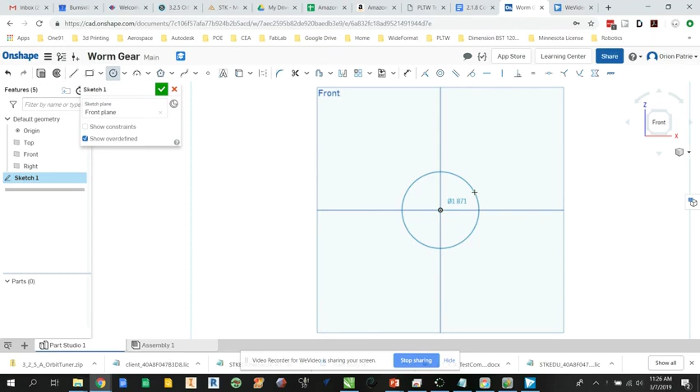Okay, so today I'm going to show you guys how to make a worm gear and worm set on Onshape. So first thing we're going to do is we're just going to make a cylinder. Okay, so I'm just going to put a sketch on this front plane. I'm going to make a circle. I'm going to make mine 0.375, 3/8.

I wouldn't really go any smaller than that because if you're going to 3D print it, for whatever reason, it doesn't come out. And then go ahead and extrude that. And you can extrude it an inch if you want. It doesn't matter which direction, but go ahead and make that. And then we're going to put some threads on that.

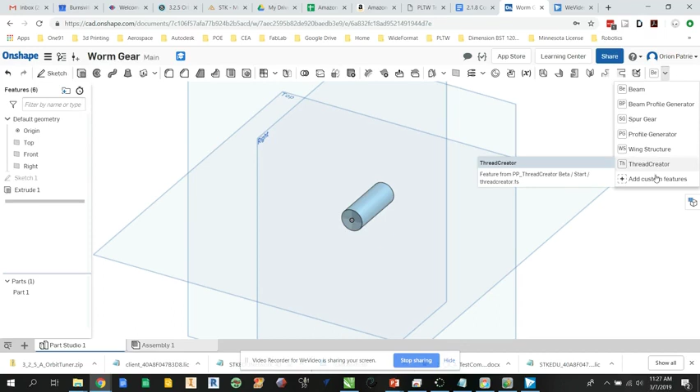So we're going to go up here to our custom features. And hopefully you've already got the thread creator. If not, you want to go to add custom features and add it. But you want to put the threads on there. You want to choose this. It's a 3/8 8 now. We want it to be a 3/8 10. So we're going to make this 0.1. Make the pitch 0.1. That should make it a 3/8 10. Fully threaded. Okay, so you can see the teeth on there. So go ahead and green check mark that.

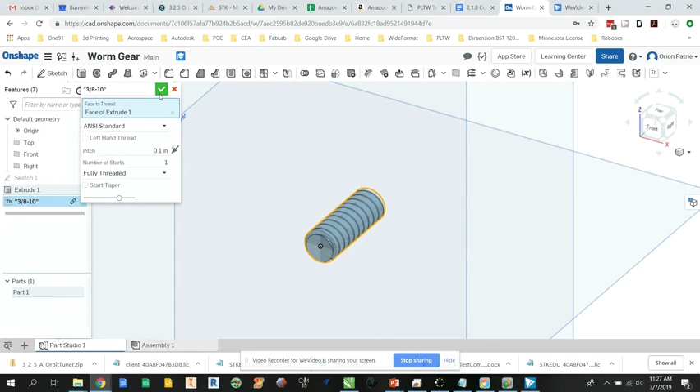Now at this point, this is pretty much the worm. All you need to do is maybe put a hole in it for the motor, and maybe another connection so that it doesn't fall out. But we want to basically split this in half so that we can get the teeth, so that we can then make the worm gear. Okay, so to do that, we're going to use our split tool. Okay, which is right here called split. We're going to click that.

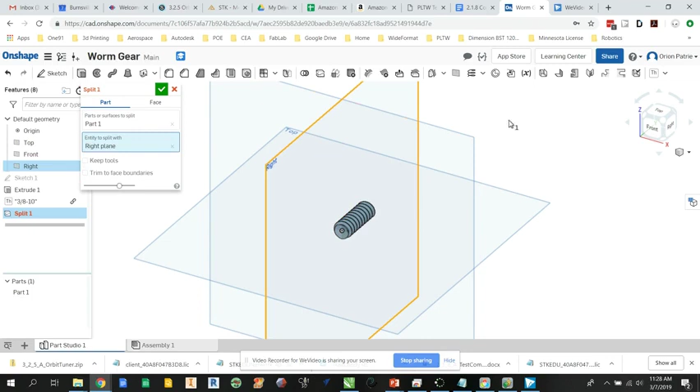Parts or surfaces to split. Well, we're just going to choose this dude right here. Entity to split with. I'm going to choose the right plane. And then I'm going to green check mark it, and I have two. Okay. So I'm going to go over here to the left-hand side. I want to go down here to the bottom. And I'm going to hide part one. I'm just going to click on the eye so it goes away. I'm then going to put a sketch on that.

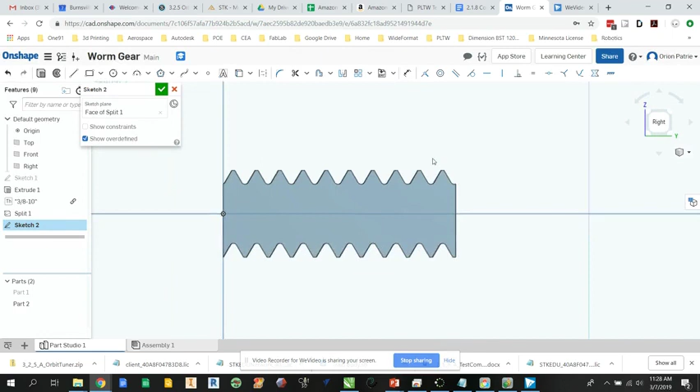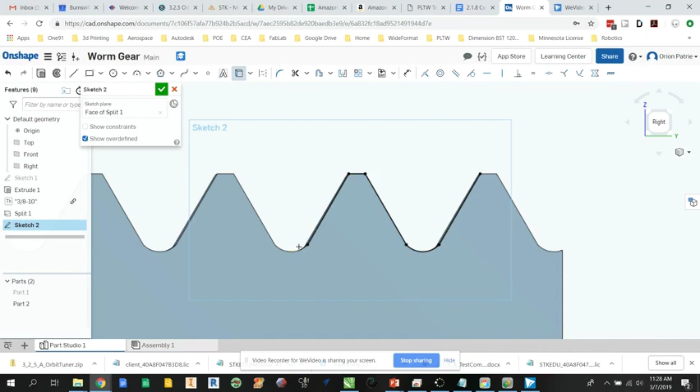Okay. And all we need to do here is we basically just need one tooth. Okay. And maybe a valley. So what I'm going to do is I'm going to use our project. And I'm going to come in here and I'm going to choose the lines that make up the valley. And then one full tooth. Okay. And green check mark that. And then I'm going to come over here and I'm going to right click, copy sketch. All right. I'm then going to add a new part studio.

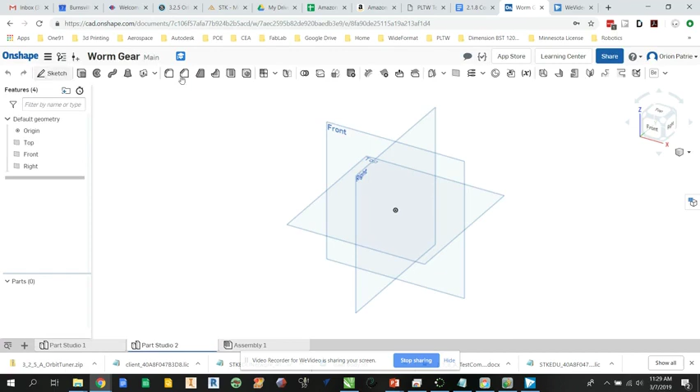Put a sketch on here on the right plane. I'm going to draw a 1-inch circle. It doesn't have to be 1 inch, but you can make it bigger if you want. It's just the bigger you make it, the more teeth you're going to need around it, and so on and so forth. I'm then going to paste my sketch entity. Okay.

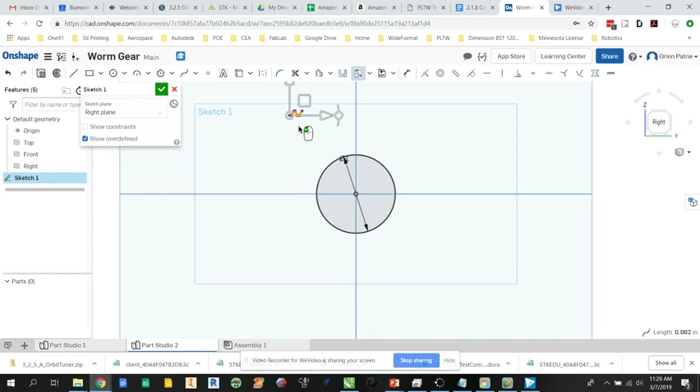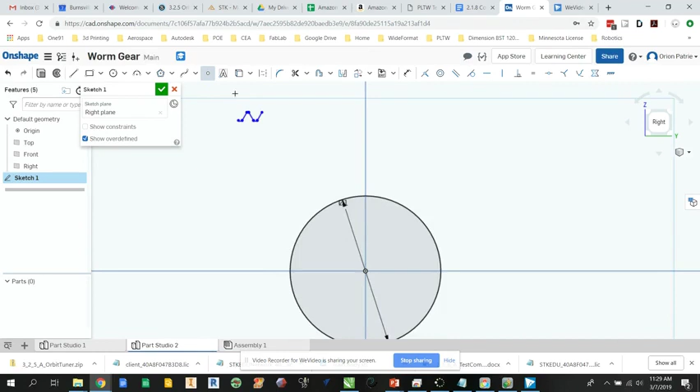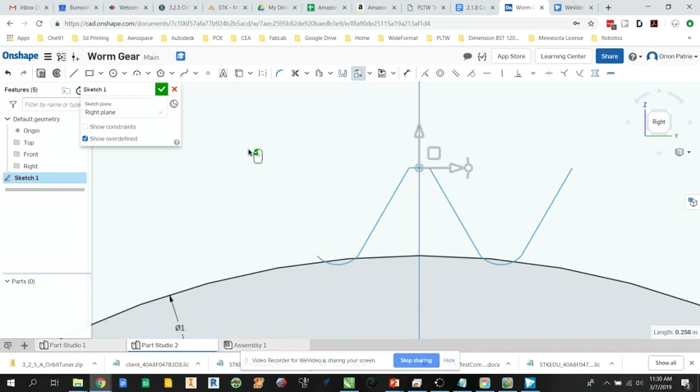And then what I did is I actually moved this center point just so that everything's centered. I'm going to put a point there. I'm going to transform, move this, and I'm going to put that point right there in the middle. And then I'm going to move this to the middle of my gear. Okay. But you kind of want to move it like that so that these are dipping down. Okay. Click it into place. So there's my tooth.

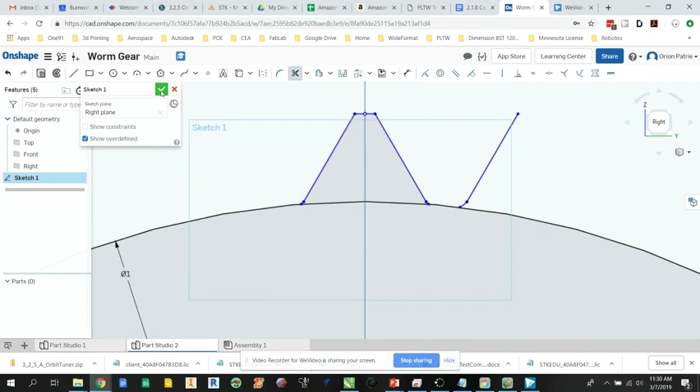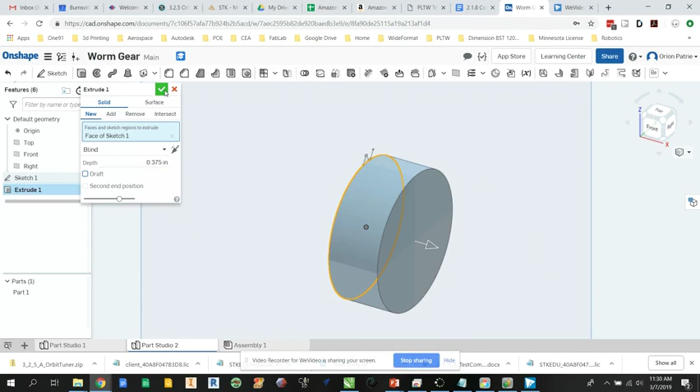Okay. Probably trim off that part so that we have a full tooth there to extrude. Okay. And then at this point, I'm going to extrude this gear about the width of my worm gear, so 0.375. Okay. You can do a quarter if you wanted. Okay. Make the sketch visible again. So I click on the eye over here, and then I will also extrude the one singular tooth, same amount.

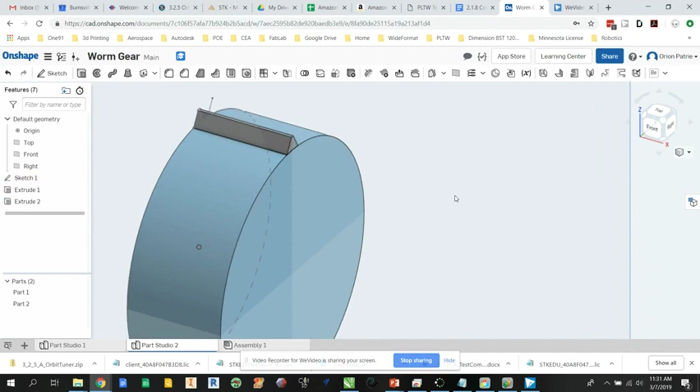And then I'm going to do, oh, I'm sorry, when I extrude that, I want to make sure I extrude it as a new part so that I can do a circular pattern. So I'll go here, circular pattern. I'll choose this as my entity to pattern. I'll choose this as my axis. And then basically you want to go in here and get this thing so that the teeth kind of line up with this a little bit. So I'll try like 32.

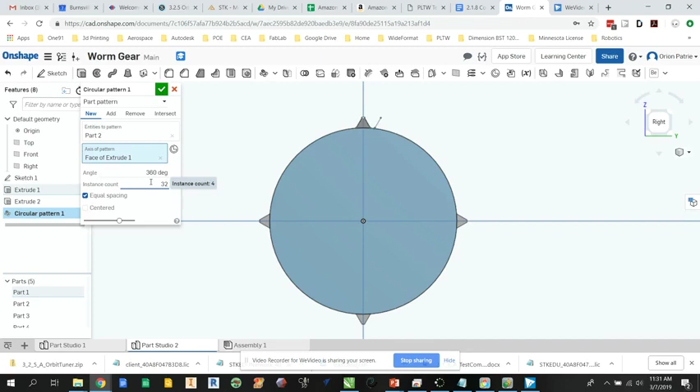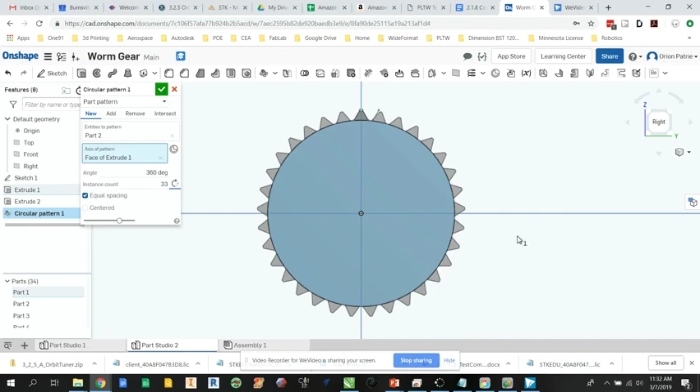So 32 is not too bad. That's pretty close to what I need. Okay, you could maybe do 33. That gets a little closer. Okay. But so you want the teeth around it. So now if your gear ratio, let's say you need 15 teeth around this, well, obviously this is too big. I could do a 1/2 inch and probably get my 15 teeth. All right. But so I make that. Okay. If you want to edit it, I would edit it now.

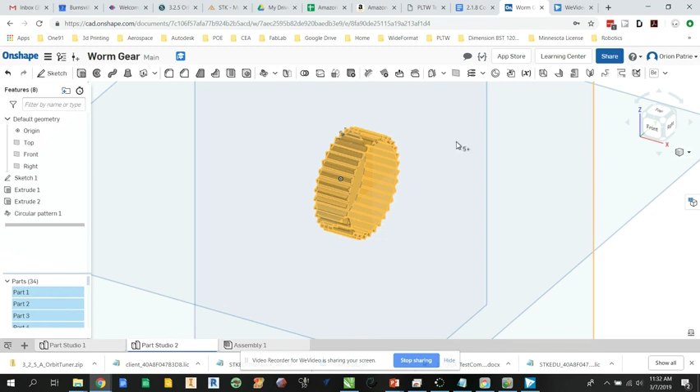But then the next step is you're going to come out here, take part 1, scroll all the way down to part 34, hold shift and click on part 34 so it selects everything. And then you're going to do a Boolean union so it puts everything together into one part. And so therefore you have that one gear. Then the last thing I like to do is make sure that's whole again, but I want to bring in an assembly and I want to insert both parts.

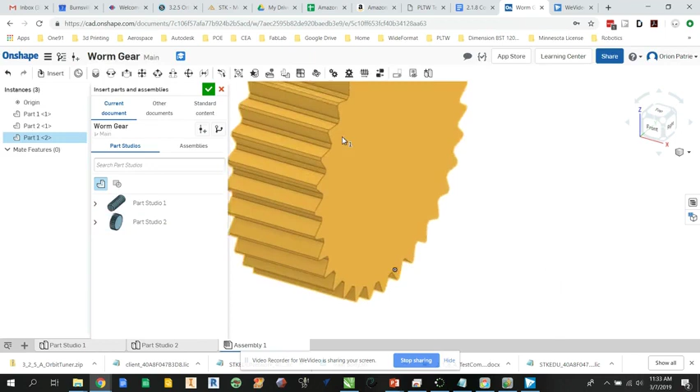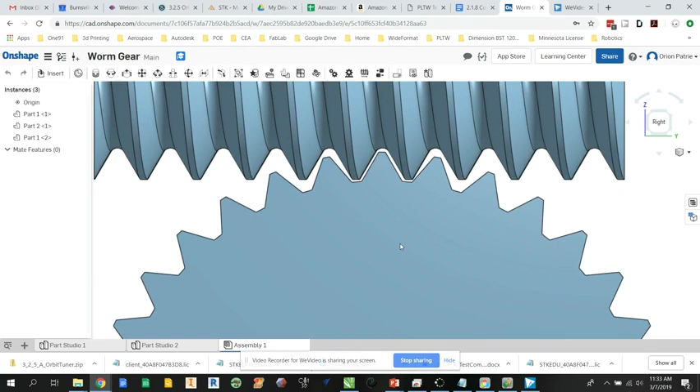Okay, so I want to insert both parts and I basically just want to kind of put this down underneath it to see how they're going to interact with each other. So you can see right here, this will do pretty good. Okay, so you can see right there, those are in the valleys pretty good. So we should have a pretty decent worm gear set there. Okay, and then obviously you can center this up a little bit more if you need to.

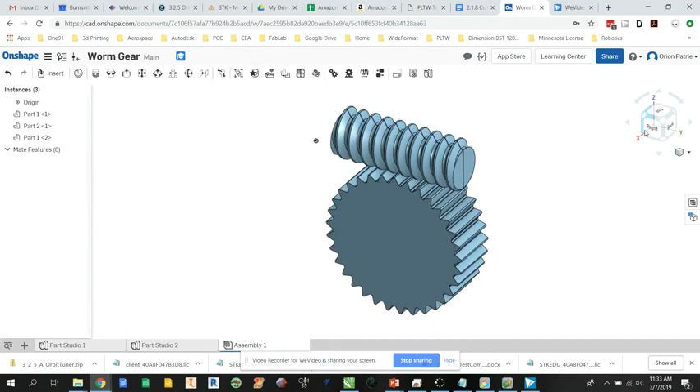Okay, but should have a pretty good mesh there on those two. So, but that's how you make a worm gear set. So if you have any questions, ask your instructor.